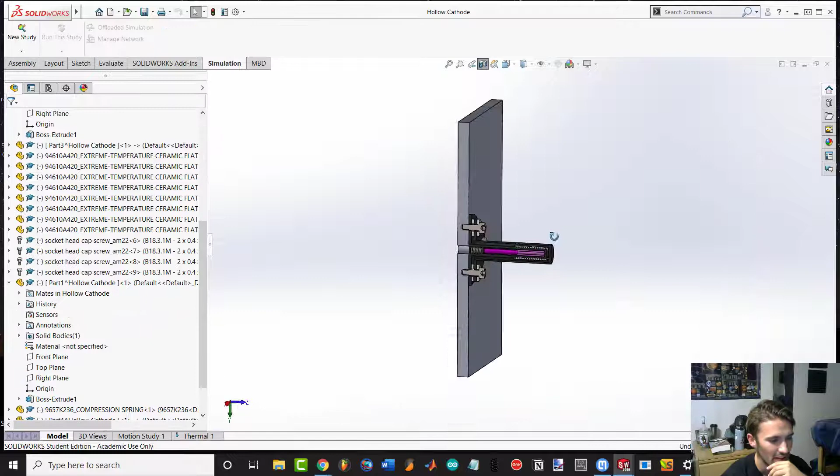So as you know, I'm just trying to design a hollow cathode. As you can see right here, I'll take away from the cross-section view. Here's the hollow cathode. It's mounted on this big aluminum plate back here.

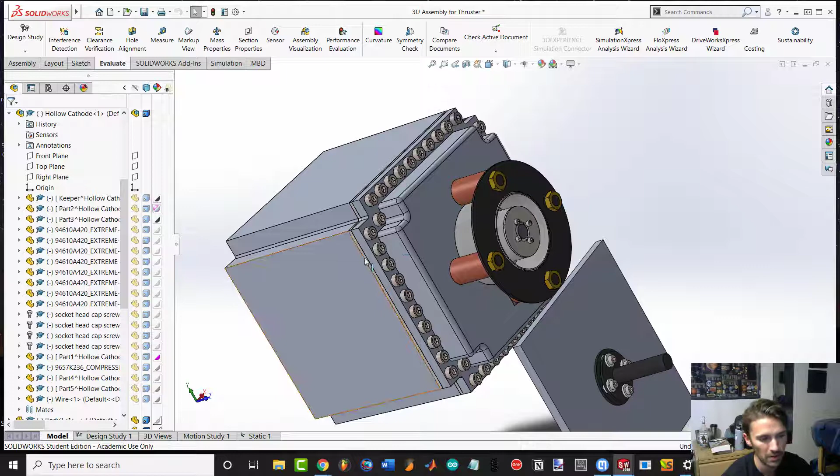To give you some context, the actual use case application I'm designing it for—again, this is just stuff I'm doing for free time—is going to be on a kind of CubeSat. So the Hall effect thruster it will eventually be put into is right here. It sits on top of a pressure vessel, which I've designed. For reasons regarding the CubeSat standard, the pressure vessel has to be made out of aluminum. So the cathode is going to be mounted on top of this aluminum plate, which is why I modeled this big square that you uncharacteristically see sticking out of this cathode. So that gives you some context about why that's being modeled for this particular subassembly.

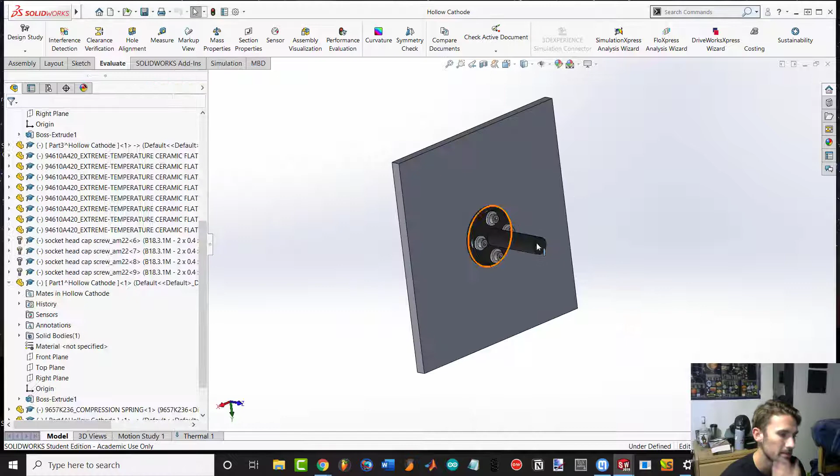So running the thermal design, again, what I'm basing at least the thermal studies on is the Gurciullo paper that you told me about. As you remember, we tried implementing it. We were running into a few problems.

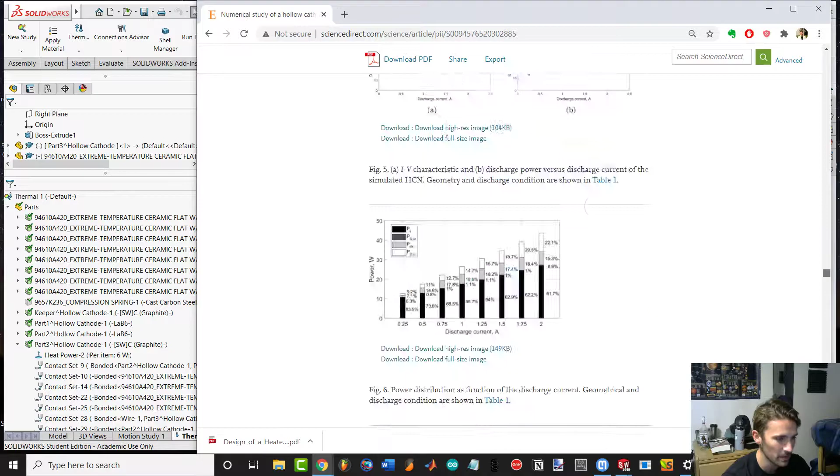So I decided—because Gurciullo actually, in his white paper, and I'll scroll to it right here, where is it, there we go—yeah, actually gives an example hollow cathode setup with dimensions that are actually pretty close to what I need for this setup. So I figured, okay, instead of trying to reinvent his wheel, I'm just going to take the wheel that he speculated will work with all the dimensions, make the actual CAD design, the model of it, and then see if we can actually manufacture it, lab test it, and use it as another interesting white paper to see how well his model works on hollow cathodes.

So again, just kind of the main parameters to pay attention to: the insert temperature he was aiming for was 1310 degrees Kelvin. So that's what I'm aiming to have for this simulation.

I'm aiming for the plasma—once the coil, the wire, heats up the thermionic insert and starts emitting electrons and creates the plasma—this model, if my understanding is correct, tells me the power output of the plasma into the cathode when it's running in self-sustaining mode. So I think that might be one premise that I have to have you vet, get your feedback on, make sure this is what this paper is addressing.

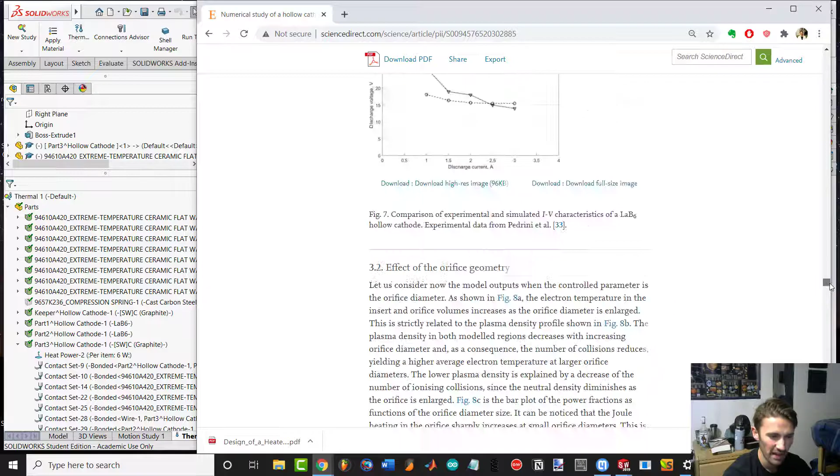But if that is what this paper is going over, at the very end he actually gives a nice little picture showing, okay, for a cathode putting out 1 amp of discharge current from the Richardson-Dushman equations you would derive, it looks like there's about 5 watts between electron and ion bombardment of the insert being deposited here from the plasma once it's ignited, and then about 6 watts on the orifice being deposited. So that's the input I'm putting into this thermal model you see here in SolidWorks, which I'll show off in a second, at least the results from me running it.

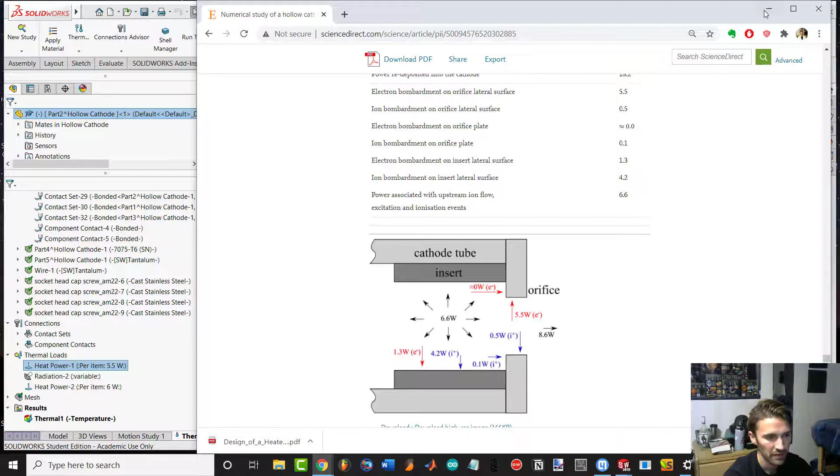I'll just quickly point out, the heat power into this center area in my insert is 5.5 watts, from the previous diagram, 1.3 plus 4.2. And then the orifice, 5.5 plus 0.5, 6. I have that being inputted right over here, and then we get these results popping out. As you're seeing from the temperature gradient here...

451 degrees Celsius is not quite 1310 degrees Kelvin. So I'm figuring it's something with my setup. I'd love to get your intuition about what's going on here, or maybe something is wrong with the model, but I highly doubt that, because he's the one working on the PhD and I'm still working on my undergrad.

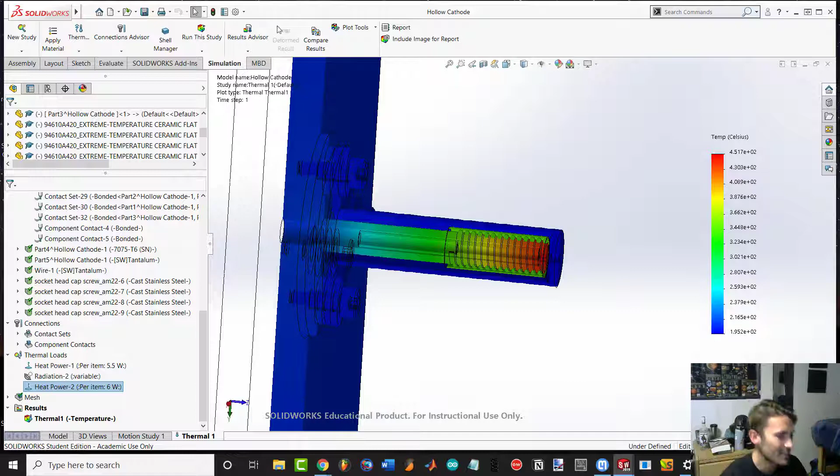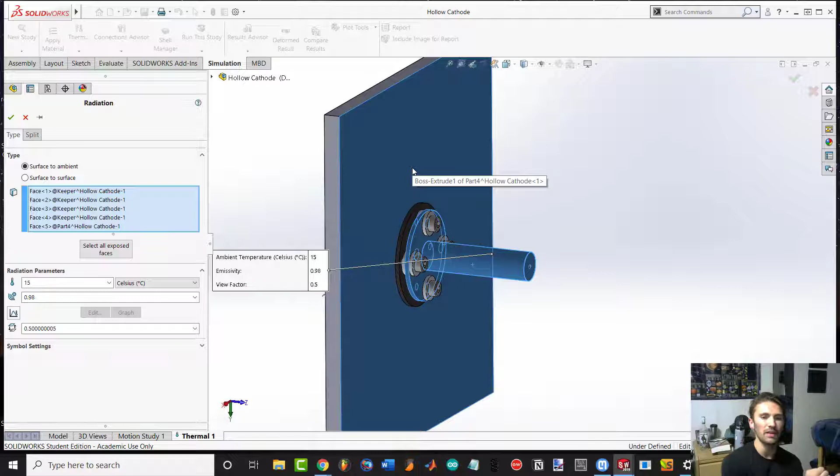So here's kind of the setup. This is self-sustained plasma. In terms of how the heat's being dissipated, I have the radiation - I'll hide this so I can show you my setup. I have the radiation being dissipated off of the face of the plate that the cathode's mounted onto, and then just the keeper component here. I have it radiating.

This is mostly just the radiation parameters I have for this setup - it's in a vacuum chamber, so going to be around, I'm assuming, 15 degrees Celsius. It's not going to be in the vacuum of space, because my reading of the literature - and you can correct me if I'm wrong - is that the environment on Earth is going to be a lot harsher for the cathode than in space, because it's actually able to dissipate a lot more heat, or it's basically a lot less likely to fail, because you have a bigger temperature gradient between the cathode and the vacuum of space, which is a lot colder than 15 degrees Celsius. So this is why I set it up with these parameters.

So maybe that's one area where the simulation isn't quite right. Maybe you can speak to that a bit. The emissivity, I got that from calculating the emissivity of graphite online, just looking online for that. Maybe that'll be a different parameter.

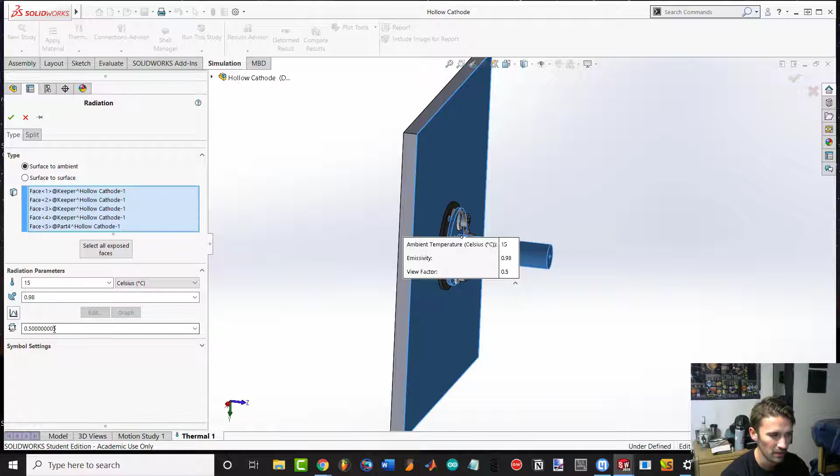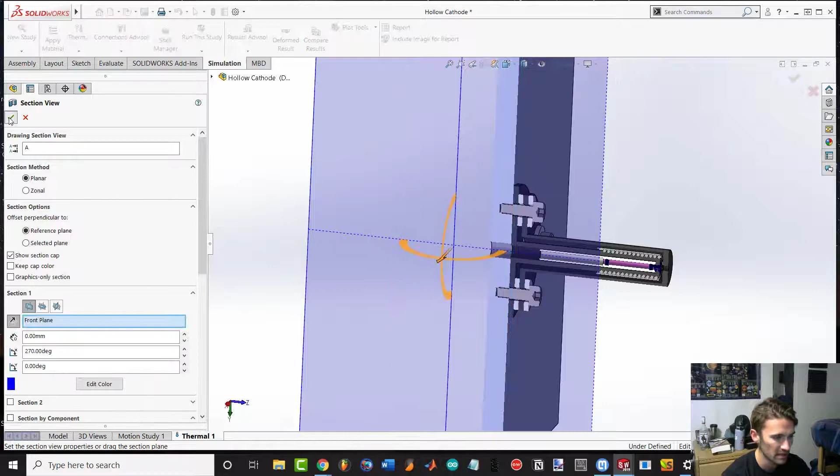Troubleshoot there. Again, the heat powers are from the Gracillo paper. And then all the component contacts - basically whenever there was a connection point between two interfaces, I just treat that as a bonded connection. The one exception I'll point out, and maybe this is another area that could use some troubleshooting, although the Gracillo paper doesn't really talk about implementing this, is the tantalum foil that you told me to implement in my simulation.

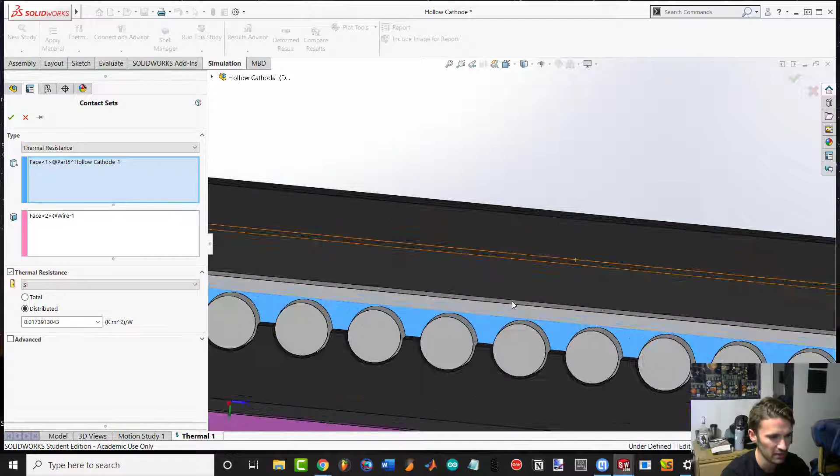I have it modeled as technically insulated. I wasn't quite sure how to model this in SolidWorks, so what I ended up doing is modeling a thermal resistance interface between the foil and the wires. I looked up online what the thermal conductivity of tantalum is, and of course the inverse of conductivity is resistivity. So I put that in, took the reciprocal of that, got this number, and distributed it over the whole thing.

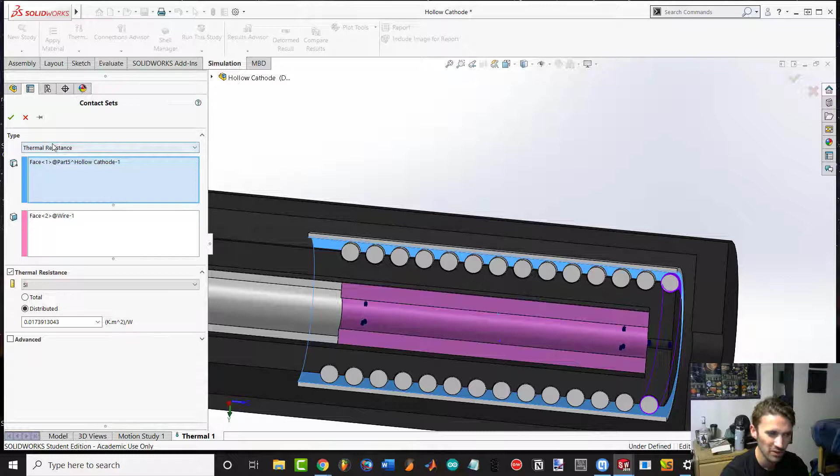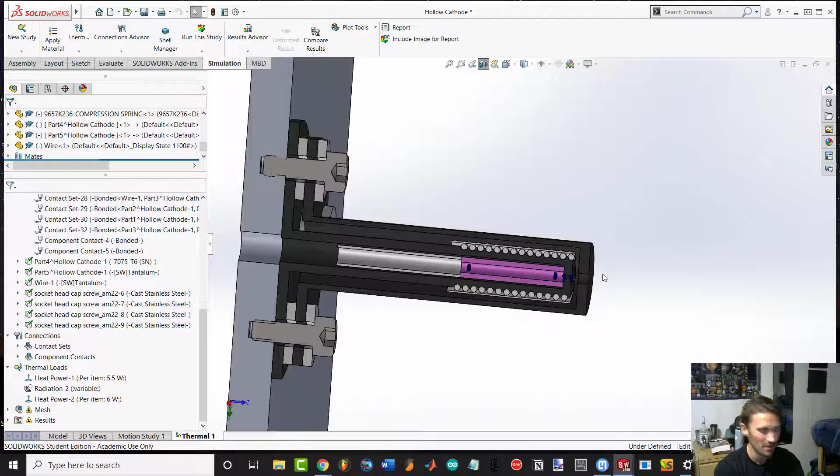I also tried modeling it as insulated before, but when I ran that simulation, it gave me negative - basically that the foil was at absolute zero, which didn't make any sense. So I decided to model it as a thermal resistance, but that might be another area where this simulation isn't the best. But yeah, that's kind of the setup I have.

I'd love your two cents on what might be going wrong, because again, the results - 500 degrees Celsius, or 450 degrees Celsius, does not seem high.